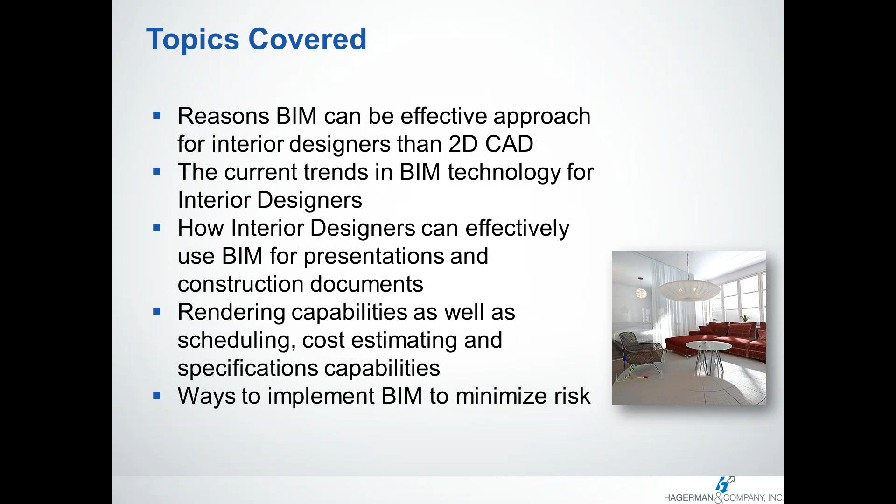So the first thing I want to talk about is why BIM is such an effective approach as opposed to traditional 2D CAD. BIM has already been around for quite a while, and what happens is there are firms that have implemented it and are doing well with it, and there are firms that have tried it and might have jumped out, and there's everything in between. So it really depends on where your firm is at, how much you're taking advantage of the technology.

Specifically, when we talk about BIM for the interior design space, I think companies really need to think about leveraging the information in the model. That's the most important thing a company can leverage that will cost them the least money and the least investment to actually get out of the tools. BIM is not just working with a 3D model—if I were just working with a 3D model, I wouldn't need a particular BIM tool, I could use 3ds Max or some other general 3D modeling tool. Where most effective firms are really going with this is taking the information from that model and using it in an effective way. So the I in BIM, we can never forget the I in BIM, which is the information portion.

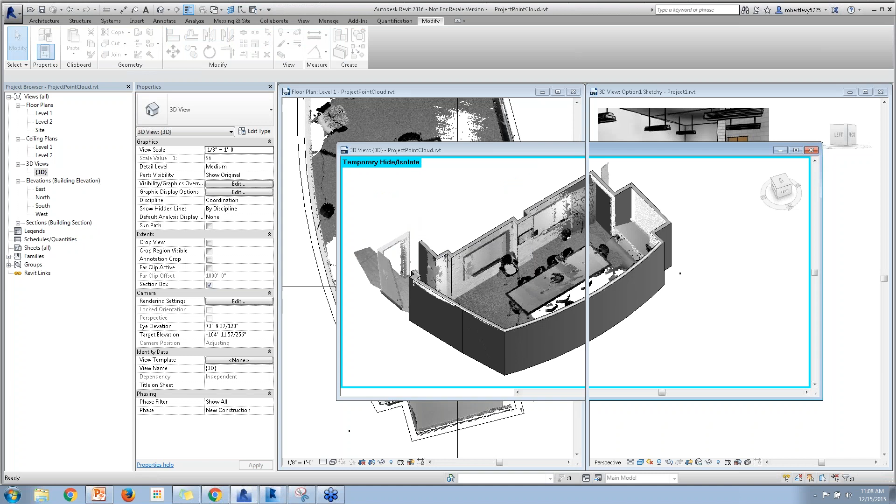So what I could do is, if I know what I'm looking for, I could search for this data in the Revit model. If I have something modeled here, for example I have a sample project that I did, and if I know I'm looking for a certain furniture piece, I can create a schedule and filter that schedule based on what kind of furniture it is or what manufacturer. I could list anything that's inside of this building information model.

There are other tools that might be able to model this, but you just cannot do it if you're doing a 2D workflow. So it's highly effective, and a lot of times it's underutilized because BIM is a newer way of doing it - not really new anymore, but a lot of project managers don't have that much experience with BIM. Some of them do, and they're highly effective, but a lot of project managers are just new to the whole BIM world and how to manage these BIM projects.

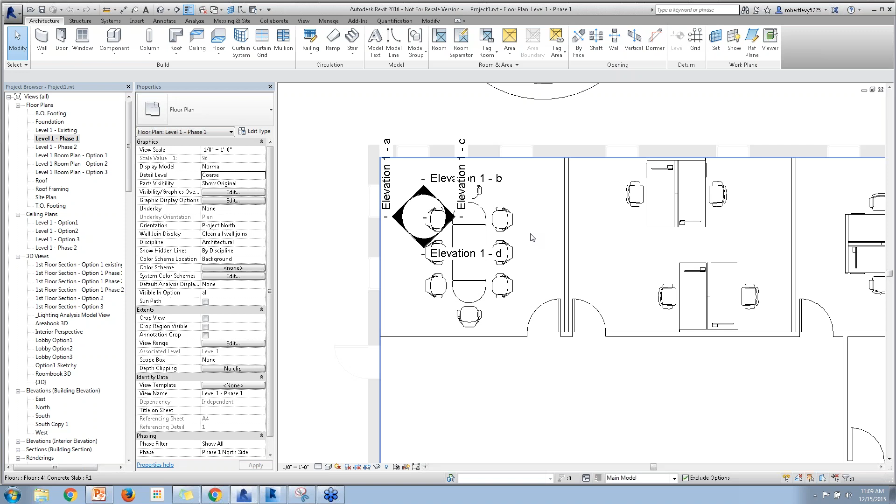Another thing you can do with this information is streamline it for specifications writing. A lot of times we have to do specifications of furniture, fixture, equipment, and these BIM tools, or Revit I would say, allow you to pull up this information very quickly and organize it so you can create specs for all of your projects, and specify furniture and other things that are appropriate, so you can have your construction documents ready faster.

Really the only requirement of this is to put the information in. There are several ways to do this. You could simply input the information into, say, a Revit family. You can also put a link to all of the information - you can link your Revit model to another database and pull information from that database. This is how some of these Revit add-ins function when they do specifications: they interface with a database, you fill the information into that database, and you can pull it up using the model or the database.

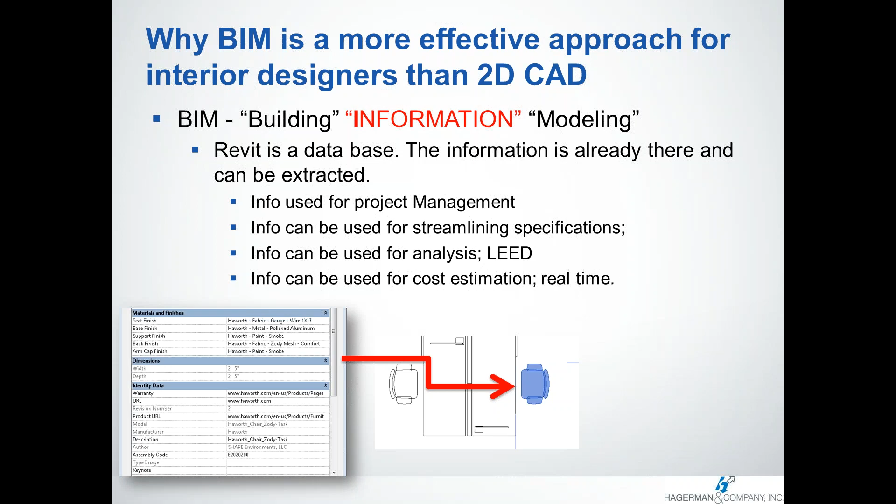So you really have to look at where your firm is at in the BIM implementation. Some firms are still kind of new to it, other firms are about middle ground, and some firms are pretty advanced. There's help for everybody depending on where you're at.

There's a different solution. So what are some of the current trends in BIM technology for interior designers? These trends aren't just for interior designers - there's trends for architects, engineers, construction professionals, but they do relate to the interior design profession in many ways.

For example, cloud rendering. We like to do a lot of rendering for our interiors. I think a lot of times we want to do more rendering than the client probably wants to pay for. But the reality is that if you can get a rendering done quickly, cheaply, and easily, you can probably provide your client with some freebies and some idea of where the project is going, rather than just a 2D floor plan or some 2D drawing. I'd hate to say it, but there are a lot of very educated clients out there, but there are also a lot of clients that will go through, read our drawings, pretend and nod to you and say, yes, I understand, and then when the project goes up, they look at you and say, I didn't think it was going to look like this.

So rendering is very effective, and sometimes the client doesn't even know what they don't know. So they don't even know that the project may not look the way they wanted. If you can provide some kind of rendering, even if it's very basic and simple, it's extremely effective.

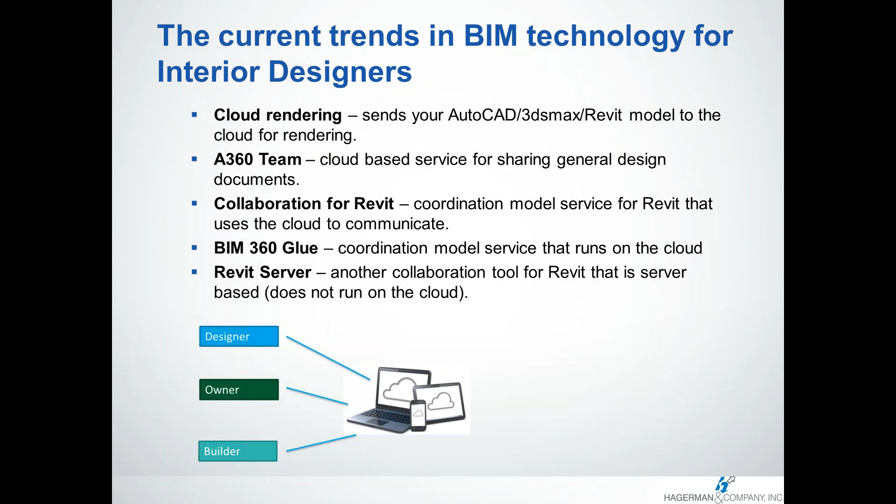So more of the trends, there's another trend that I think is really fascinating, this trend of reality capture. If you've heard that term, it's another one of those Google terms everybody wants to know what it means.

Reality capture is dealing with taking the real world and somehow putting that onto your computer, being able to capture that data somehow. I think a lot of firms, I'm not sure how many are doing it, but I don't hear that a lot of them are. Probably not as much as I would imagine would be useful.

But the laser scanning technology has been out for a long time. Nowadays, we can laser scan interiors of buildings and get an as-built model built very, very quickly and accurately.

In my days of working in an architecture firm, I used to go out and measure things manually, and we had no access to this. At the time, I didn't even know it existed.

To be able to capture that data without having to manually measure everything is a real time saver. It's really just the most effective use of your time. The only question is going to be, what are you going to pay for the laser scanning equipment, and are you going to hire somebody?

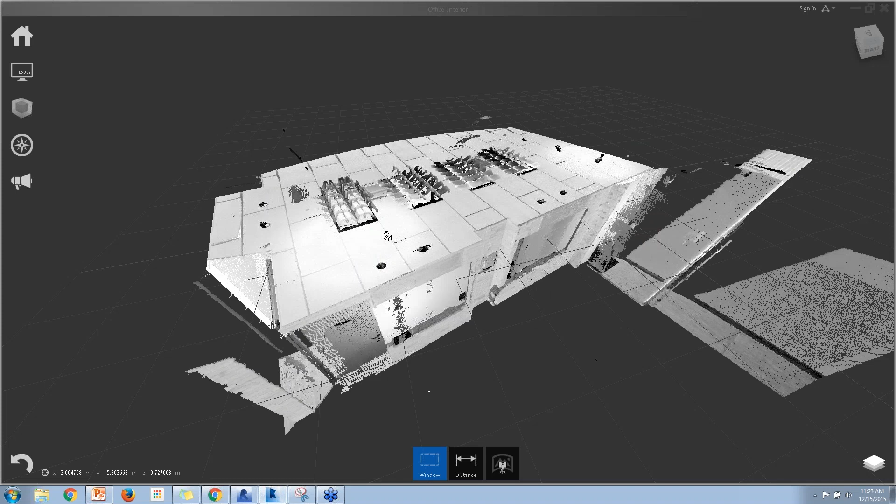But with this laser scan, you can take it into a tool such as Recap, and here I'm showing Recap. This is a laser scan of an office, and you can kind of see, if I go inside of it, there's a conference table in there. And this is very accurate.

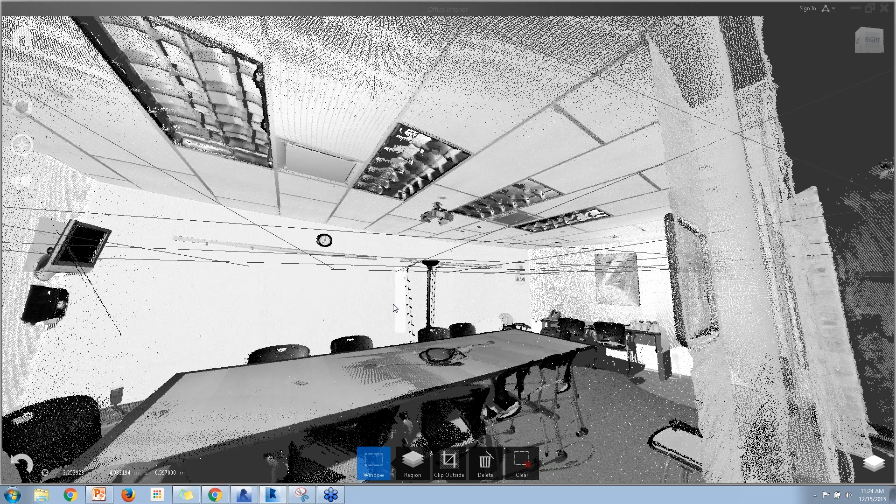Now, it is a bit hard to read, so there are ways of working around this to be able to read it and create your own model from it. There are no tools I've seen so far that automatically create a model of this, so I have yet to see that. That would be awesome if we could do it, but we're just not there yet from what I've seen in the technologies.

But you could take this model into Revit, or this point cloud, we should call it. And when we take this point cloud into Revit, it looks pretty much the same as it looks in Recap.

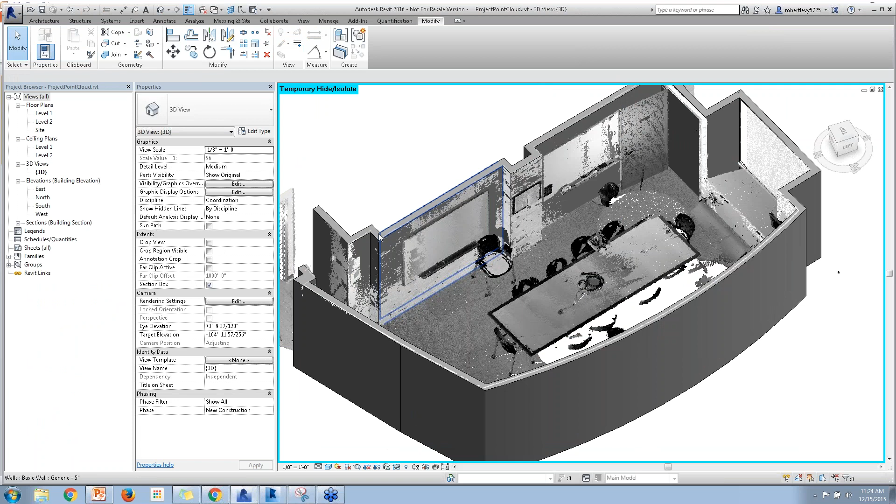So if you look at my screen right now, I've taken that model that I have a scan of, and I just drew or modeled some Revit walls around there.

So I got a very accurate model, and it's kind of funny when you start doing this because you realize how many construction errors there are, or whatever it may be. Who knows, I'm sure there's probably reasons for it, but walls are built at angles, and there are walls you might think were straight and they weren't. But essentially, I created a quick little Revit model of that room based on the point cloud, and this can be done. There are some tricks around it.

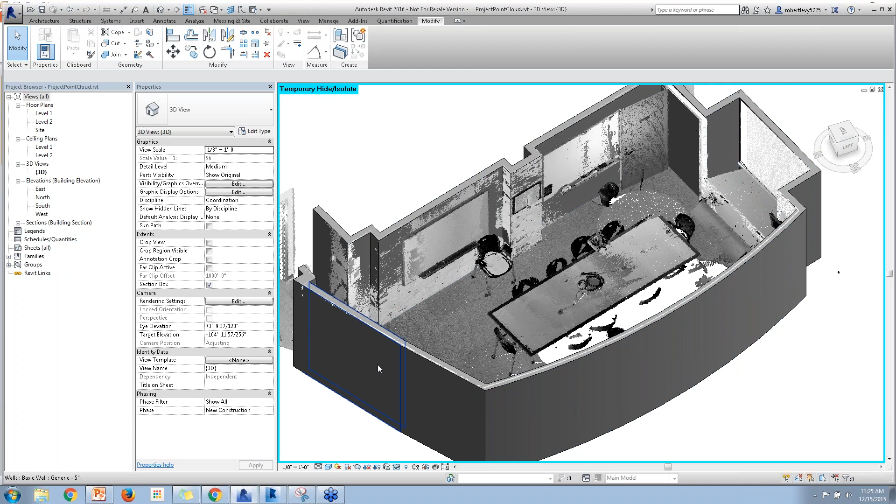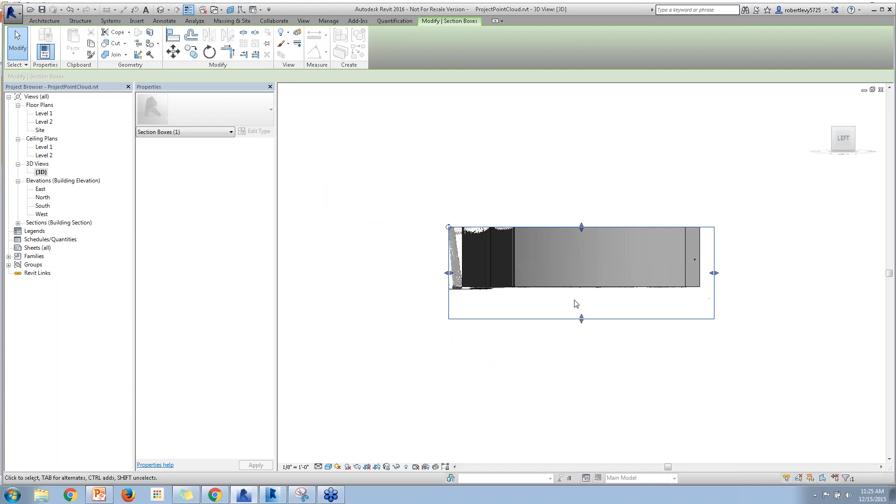For example, if you slice the model, you can more easily see some of the walls that are around it. I created a little section box around my point cloud, and that's a very effective way to get the data you need, or the wall location, so that you can know where the walls are. I made that section box a little too small, but you can see with a section box you can eliminate a lot of the unnecessary points in the point cloud, and see more clearly what walls you're going to be drawing or modeling.

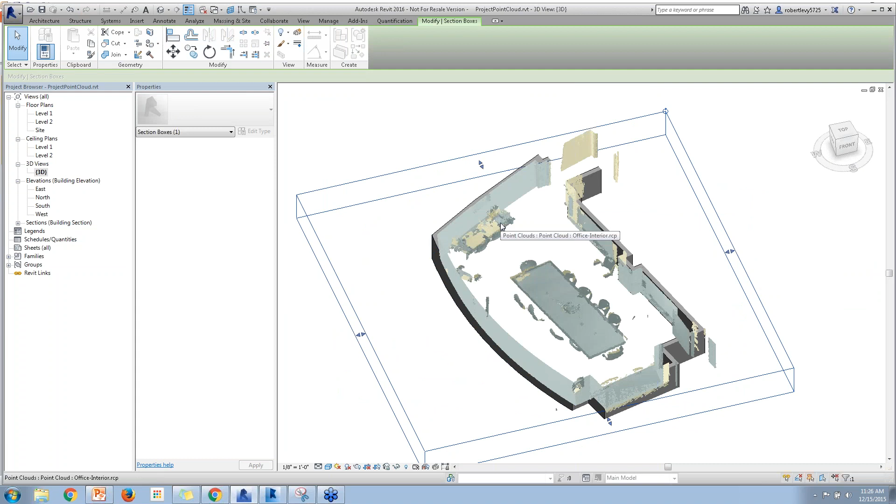Does BIM 360 Glue work with AutoCAD?

Absolutely, absolutely. BIM 360 Glue, what it essentially does is it takes, say, 2 models, say 10 models from all different softwares, whether it be AutoCAD, even CATIA, some of these weird file formats. It'll gather those models into one master model, and you can see that master model in the cloud. So yes, it will work with AutoCAD. So if you had an AutoCAD model built and you're working with somebody working in Revit or some other software package, you can still collaborate on that project in 3D.

So you can check for clashes and coordination issues. Now, it doesn't have all the benefits it would if all the firms had Revit, because then you could do clash detection and effectively get the information out and see it on your Revit screen. So there are varying levels of effectiveness, but the beauty of it is that it's very open and accepting of different file formats.

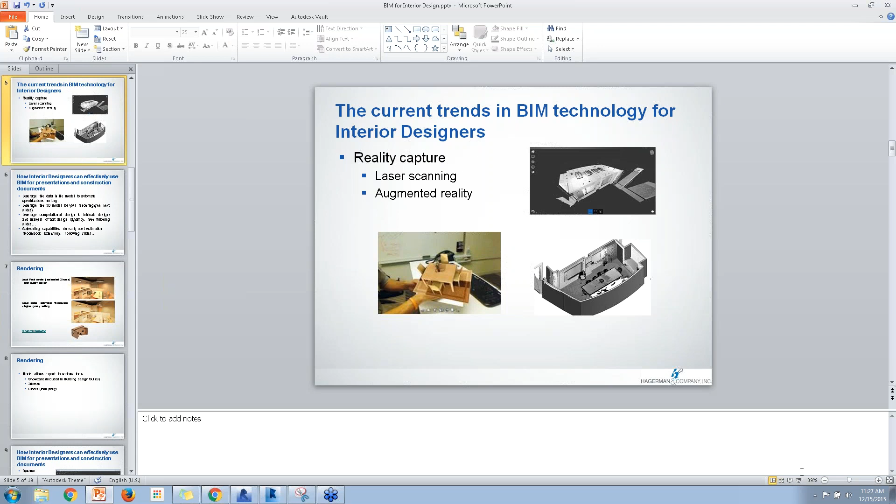As I was saying, there's another technology called augmented reality. Autodesk had, a couple years ago, an augmented reality plugin. If you look at my image here on the lower left, there's a model of a table that this person is holding. That model is actually fake—it's not real. It's a table that was modeled inside a 3D application, and you're just viewing that 3D model. This was a plugin, still in beta. I don't know what happened to it or if they took it off, but there are other augmented reality solutions out there.

So if you have a building information model, you can—ready? I know it sounds a little crazy—actually model a piece of furniture and see exactly what it looks like in a room. So if you have an existing room, area, or lobby, and you want to see what furniture you're designing would look like, you can use augmented reality to view it. If you search for that term, there are lots of packages that let you do this in different ways, usually relying on a 3D modeling program like 3ds Max or Revit.

Very powerful stuff. I don't see it being used enough. Look at the potential—I like to design furniture, so I can see what it's going to look like. I designed a closet for my wife not too long ago, and I could actually see what the closet looks like before even building it, envisioning it inside my bedroom. I mean, how cool is that?

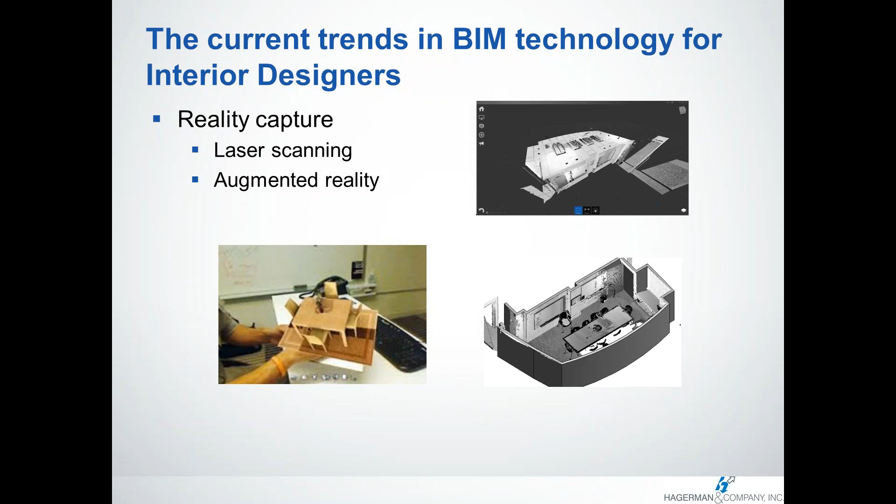Let's move on. Here are some other capabilities you can use Revit for—presentations and construction documents. I already talked about leveraging data. You can also leverage computational design. So what is this computational design?

This is like, for example, if you have an interior design of a lobby with a custom ceiling that has a certain pattern, or you're building a custom wall with fans coming out of it that follows a pattern. You can use a tool called Dynamo, which works with Revit—it's free, so if you have Revit, you can download Dynamo with it. I'll show a little bit about Dynamo in a bit. If it follows a pattern, you can program it in—if you're good with numbers or kind of a mathematical person, you can program a design and make it automatically shift and change according to your input.

The trick is it can do very intricate designs that follow perfect patterns. So if you know, for example, you're only using 2x4s to design something in the lobby, and the 2x4s can only be 4 feet long, you can put rules into Dynamo telling it that if it's longer than 4 feet, it does something else. It can make little decisions, generating a whole model of this custom interior piece that follows exact rules—so when you send it to your shop guy to get built, you can rely on it following the exact rules of construction.

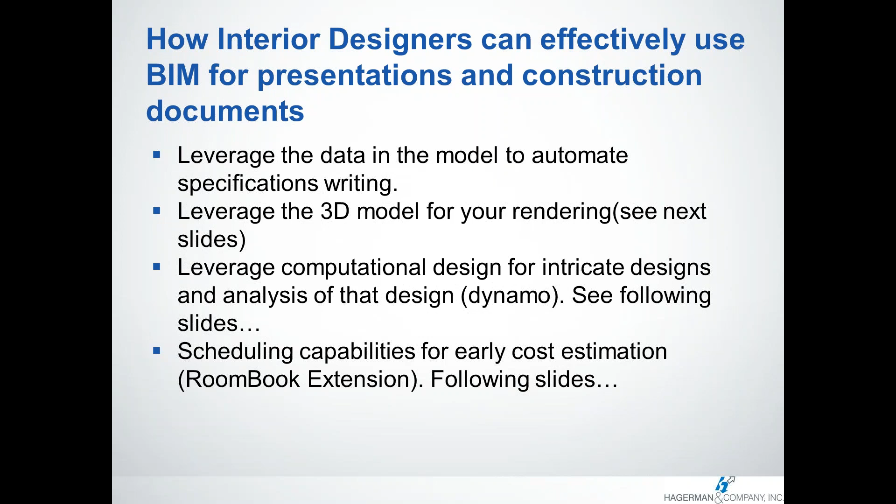Now, 2 hours versus 15 minutes, that's huge, and your computer isn't tied up. When you send a model to the cloud, it's not tied up while you're doing it. So even though you might spend a few credits here or there for a cloud rendering, in the long run it probably saves you more money than you're spending.

And then finally, this is something kind of new that I've seen, and that's panoramic rendering. I don't know if any of you have seen these little cardboard goggles, that's the Google Cardboard. It's basically a cell phone on a piece of cardboard that's been bent up to look like virtual reality glasses. What you can do is look at panoramic renderings. If you do a cloud rendering, you can do a panoramic rendering on the cloud and view it inside these virtual reality glasses.

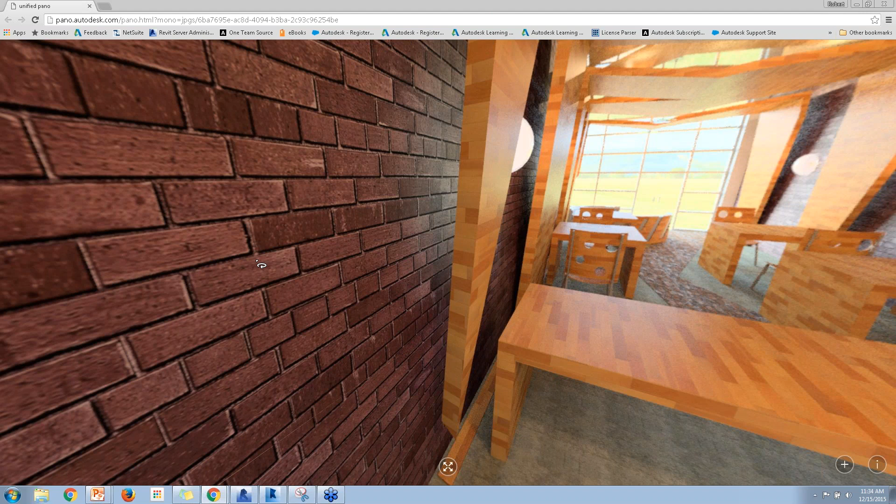I'm going to click on this panoramic rendering so you can see a sample. Here's one I did for a class one day, just a little cafe-type design. You can actually look at this in virtual reality glasses and it will look 3D. It's pretty amazing stuff, and you can really only understand it once you've gotten yourself a pair of those, or gotten a Google Cardboard and actually viewed one in it. It's pretty amazing. So what you're looking at right now isn't really a cardboard model, it's just the viewer.

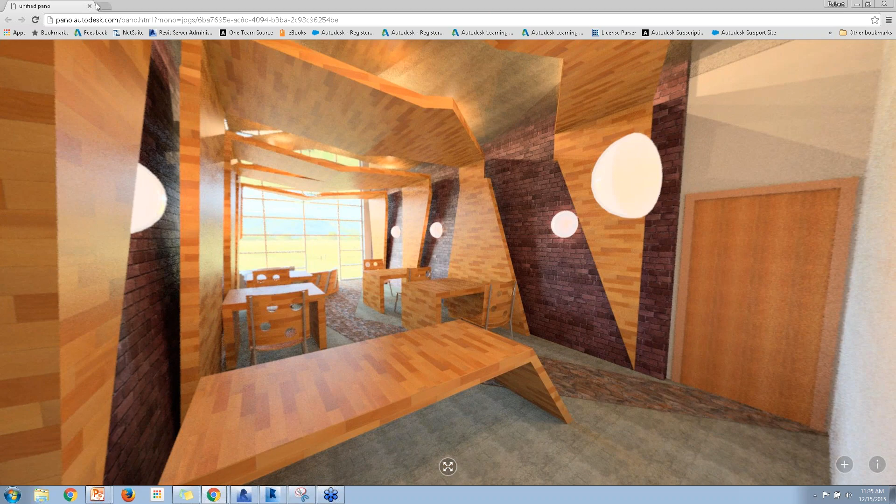This can be seen in the Google Cardboard and other virtual reality glasses, and they're so affordable that it's not even a question of whether I would get one, it's a question of when, because there are other solutions too. You don't have to use a Google Cardboard if you don't want, but this is usable by anyone with pretty much an Android phone or an iPhone. There are also other plastic ones that look a little nicer if you want to show it to your client.

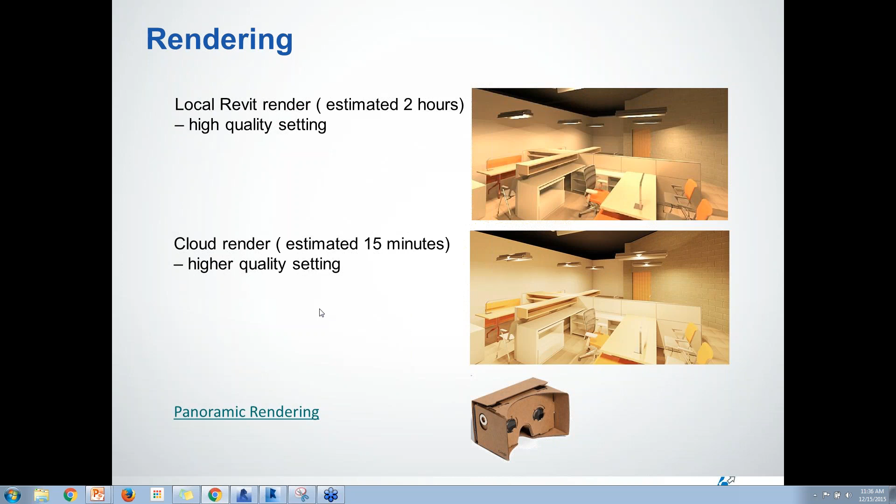So the next thing is, when you have a BIM model, it allows you to export to other tools because you already have a lot of that data in it, like material data. You can export to a tool like Showcase, which is primarily for doing 3D visualizations and walkthroughs. You can apply materials in Showcase, and it will also read your Revit materials. So if you've already applied most of your Revit materials, you can just bring that into Showcase, tidy up the materials a bit more, and then do display walkthroughs.

There are plenty of materials you can look up if you're interested, and you can look at some YouTube videos about Showcase if you want to see what it can really do. It's an Autodesk product, so it talks very well to other Autodesk products like Inventor, AutoCAD, and Revit, so you shouldn't have a problem exporting models. Then you have the classic 3ds Max. A lot of people come from 3ds Max, especially interior designers who like to use it for their visualizations. You can actually use Showcase with 3ds Max, or vice versa.

So if you like 3ds Max, you can go that route as well. There are some other great third-party applications that run together with Revit. If you Google visualization in Revit, there are different rendering programs that I find are great. They're not made by Autodesk, but they're magnificent programs. They make very high-quality renderings in very short times, and they interface very well with Revit.

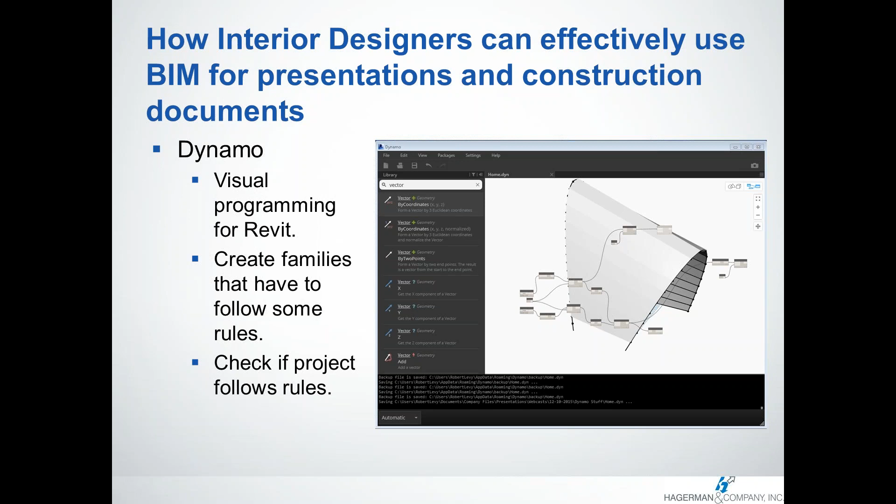Again, I think it's more of a knowledge thing. If you have the knowledge and you've practiced it, you can really do a lot with it. So I think that's probably what users usually need to work on, learning more about it and how to do it, and getting their mind wrapped around this.

This is a very powerful tool that I would recommend for interior designers to try out. It's an extension called the RoomBook Extension, and if you have a subscription of Autodesk Building Design Suite and you have Revit, you can download this tool for free. It figures out what all your finishes are in a room.

So it counts, it knows how much wall surface of finish you have in each wall surface, and it's able to tally that. It's able to count your total wall areas, and you can tell it what kind of finish it is, and it will tell you how much of each finish you need, so you can do a cost estimation of all your finishes.

Revit, when you get it out of the box, is sort of a more general building design tool, so it was never really designed out of the box to model some of these finishes the way an interior designer might want to do.

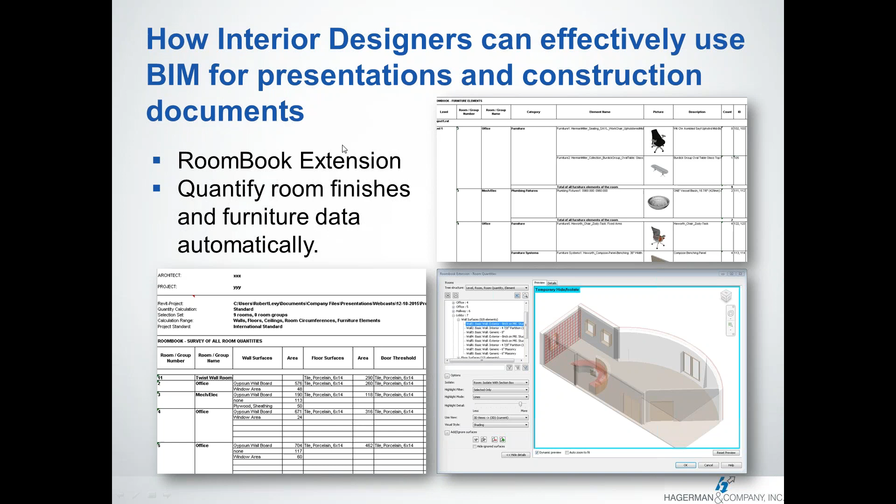So the next thing we have here in Revit is design options. I talk to a lot of firms out there, and a lot of them are trying to use Revit to do this, and I suggest, have you tried design options? A lot of people are like, well, we haven't tried that. A lot of people just don't know what that is.

So what Revit allows you to do is create this model, and since our clients can never decide what they really want, or maybe we can never decide what we really want to give, we can create these different design options, and Revit understands what a design option is.

This is very effective in interior design, because every project I've had to do with an interior layout always had design options, and we always had to set up our AutoCAD layers for all the different options, and it became a layer nightmare. So Revit handles this very elegantly.

It has built-in functions. It understands what a design option is, and it also understands what is part of your main model. So for example, if I have the outside shell of the building, and that shell isn't going to change, Revit knows that's part of your main model, so it knows not to change that. You can just manipulate the different design options.

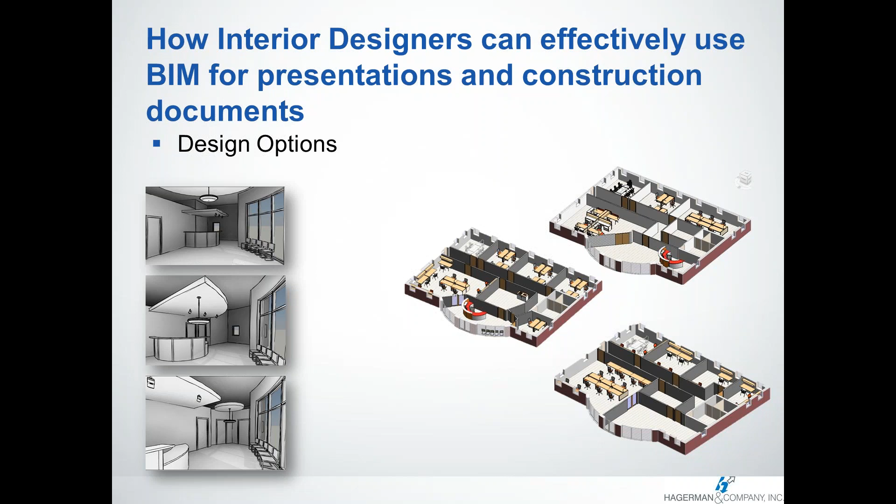There are a lot of other design softwares out there, but you usually have to manually input or set up design options, whereas Revit comes out of the box already with a feature that handles this. Another thing it does is phasing.

Again in the interior design space, say we're building a very large facility, we might build the interior in three phases. We build different parts in three phases, and we have to show this on our documentation. Revit understands phasing, so for interior designers this is great, because you can build one part of the model in one phase, another part in another phase, and another in another.

If you look at my model, this is kind of what I did. Phase 1 is the existing condition. Phase 2 might be the north half of the building. Phase 3 might be the south half of the building. This allows you and your client to very clearly see what's going on and what's going to be built, and you can color code all of these phases. I didn't do it here, but you can color code the different phases in different colors.

One of the cool things about this, and I don't know if you guys will try this anytime soon, is that you can export this model with the phasing information in it and do a quick construction simulation inside of Navisworks, showing an animated simulation of the area being built to show the order of things for a client presentation. It's very quick because the information is already set up in Revit for phasing, so Navisworks just reads that information, you do a little interpreting, tell it how you want it to build, and it just does it.

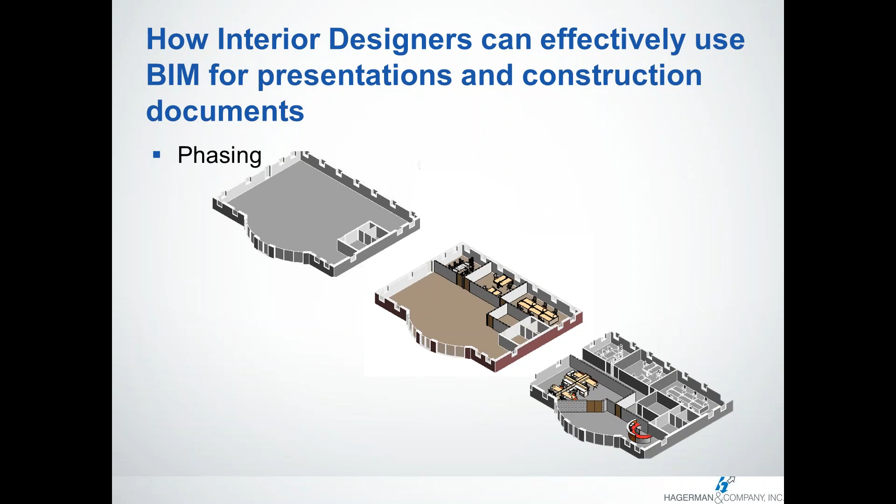So it's very effective. Now, one of the last things I want to talk about is ways to implement. We're kind of running out of time - we had an hour, so I think I have just the right amount of time here.

Ways to implement BIM to minimize risk. A lot of this I'm talking from experience. I've been to a lot of firms. Some of them are doing great, some of them are not as effective as they probably would want, and others are doing wonderfully.

One of the things, if you really want BIM to take off, if you really want to implement Revit into your firm, I highly recommend that you actually hire some outside help to get through those first projects and get everybody up to speed. A lot of companies don't realize this, but when you send your employees out to training for 3 days or whatever, they get the foundation, but when they come back, they'll have questions on how to apply the training to their own workflow, because training can only get you so far.

That's where your consultants can come in and actually help you, maybe sit with you and help you complete the project, or set up your template, or set up your standards, or help you make a difficult Revit family that you're having trouble with, or teach you how to get there.

A lot of people don't realize that this is actually one of the most effective ways to get this implemented in your office, because it ensures it actually works. Whereas if you just get training and then leave, people might say the training didn't really cover it so I can't use it, or they'll say Revit can't do it. I have another slide here that shows a lot of excuses I've heard.

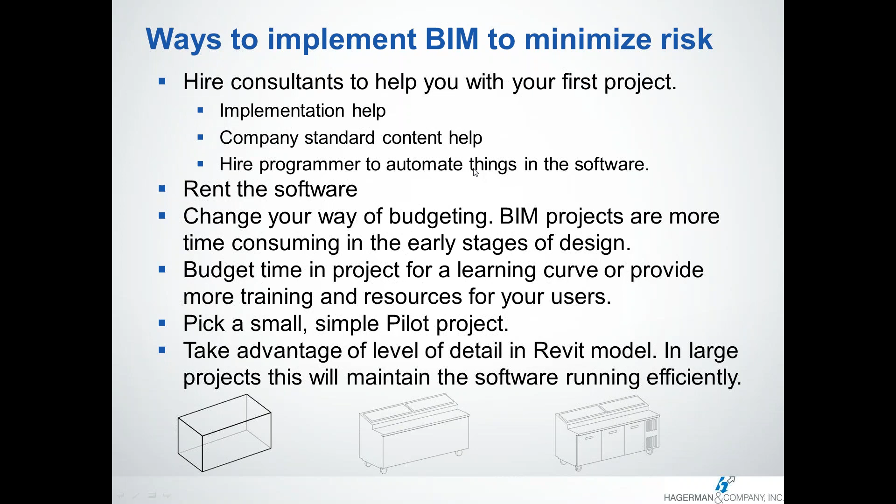Again, don't model everything. Focus on the information you need. So if you just need to show a couch in plan, don't bother modeling it until maybe when you need a rendering. Try not to front load the project as much, you know what I mean?

Content template creation: there's already plenty of content out there. A lot of it can be downloaded from online sources like Autodesk Seek or Revit City. Usually go and look at the manufacturer and call them if you need something, because a lot of times the manufacturer will make stuff for you. For example, we did some designs using Steelcase stuff, and we called Steelcase and they actually helped us make the content because we spec'd them. They were very helpful, and they got us the Revit content we needed. So there's still a lot of stuff out there. There are also companies that specialize in making content, so you can hire them just to make it. It's not as expensive as you may think. They can make all the families that you usually use on a day-to-day basis.

There's also images now in Revit schedules, so when you create a Revit schedule, you can put in an image of the furniture instead of modeling something. If you have a quick JPEG or some kind of image, just put that into your schedule. And if you need to model it later, you can always refer back to the image to figure out what it needs to look like. So there's a lot that has been developed.

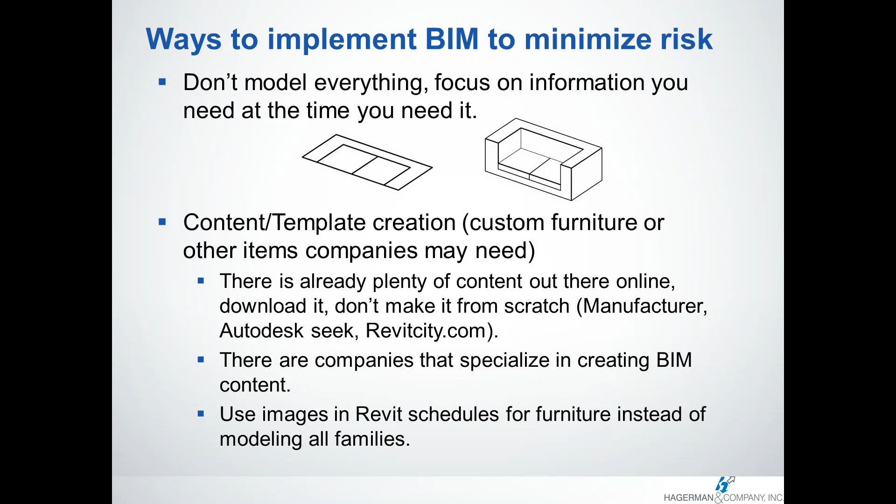Let's talk a little bit about how to break down the projects. These are a couple of ways to do it. You can break them down by different parts of the building, or by floors if you have a high-rise. A lot of this you can get help with if you hire a consultant—they'll usually help you set up the Revit project depending on how the project is. Every project is different, and every company is different.

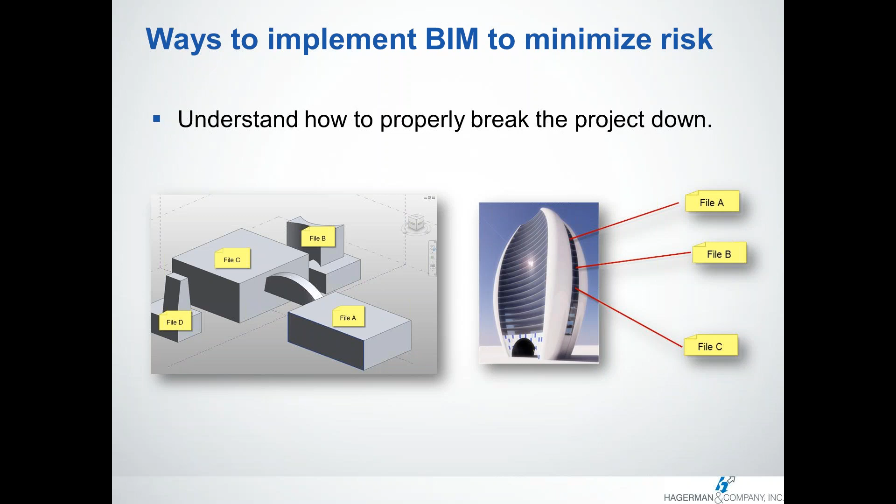The API—I didn't talk about this enough—but you can customize Revit with the API, and this is extremely powerful. Anything you want to automate in the software, you can pretty much automate using the API. A lot of people just don't have the time to learn how to program, and it does take a long time to learn. So I suggest either hiring somebody to program something for you, or looking on the Autodesk App Store for an add-in that does what you need.